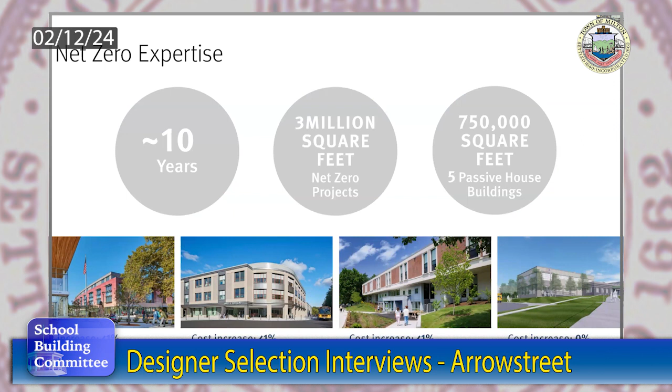So most of those projects have been done for little to no increased cost. There's no increased cost on the construction side, even in the past, but we saw a really great return on investment. We've been recognized internationally by Build Magazine for our work, not only in schools, but other net zero projects as well, as a leader in really trying to hone in on net zero as a way to get healthy, sustainable buildings at low cost with typical construction methods.

And that's really been sort of our sweet sauce of how we've been able to make this typical in all of our school projects. So in terms of the indoor environment, there's lots of aspects that are synergistic between a net zero energy building and a healthy indoor environment.

Things like bringing in natural light and daylight, views to the outside. That really helps students and teachers to be able to learn and to teach in that space. It also helps to save energy use, right? So there's these synergies between that.

Indoor air quality is one of the biggest benefits that you get, because you're getting all that great indoor air quality, which also comes with great acoustics and thermal comfort, and you're able to pair that with net zero energy to see all those cost savings on the operations side.

There are other components to the indoor environment that aren't explicitly regulated in net zero buildings, and one of those key areas is healthy materials. So we've been doing this again for 10 plus years, really focusing on classifications of toxic materials, making sure we're meeting those material selections that we use on all of our school projects.

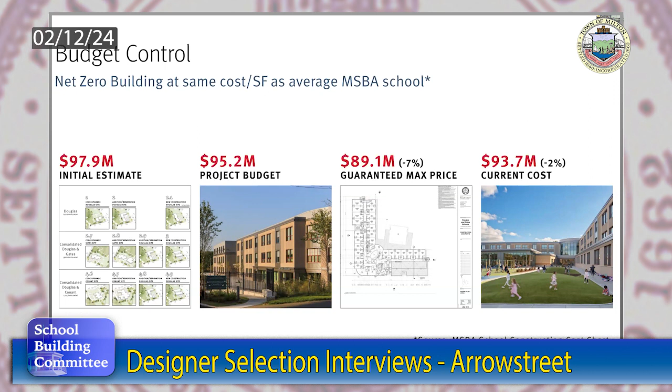And really, this is where it's all about, right? There's cost and construction and making sure we understand the cost of operating this building and sustainable forward to the people who are operating it. And through the construction and design process, we're really thinking about budget control. How can we make sure that all of the systems that we're doing are giving you that highest performing building, healthiest building, but making sure that you're staying on track.

As I mentioned earlier, in the past it was all about what was the return on investment. We knew a net zero building was going to save you lots of money in operations, but the construction costs might actually be higher. So it was like, is it a 5-year payback? What's that payback? The whole conversation has changed. There is no payback now. It's instant, because the construction costs of the net zero systems we're going to put into a building, the heat pump systems, are going to be less day one.

So you also asked about...

How we apply educational planning to really look into the whole grade reconfiguration and kind of reimagining middle school, which I particularly love that you asked about, because not only am I an educational planner, but the first career I had was a middle school teacher for 20 years. So this is really my sweet spot, and I'm excited to dig into this with you.

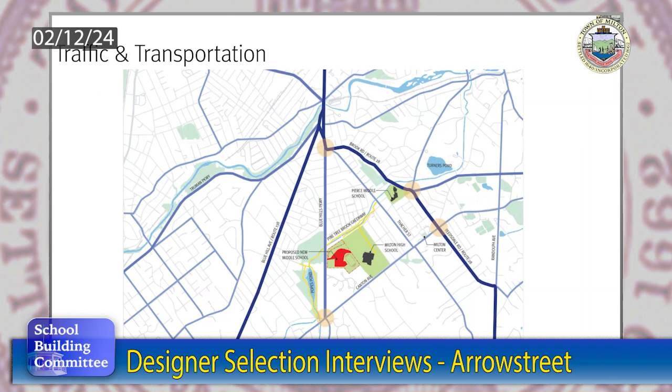So with that, I'll hand it to Jade. Thank you, Bob. Thank you.

So as we turn our sights to your site, let's take a moment and really appreciate what a treasure trove of natural resources you have. When we first came to this project, I thought I wish every child had access to this type of property. You have open space, woodlands, wetlands, rare habitat species, and a connection to a greenway.

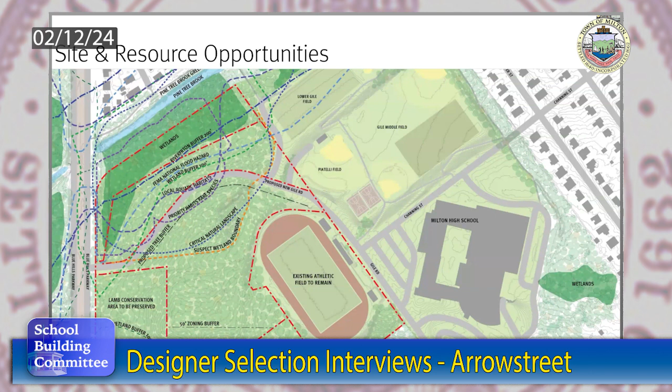As we were looking at these resources, we started to put together this early diagram, because you go out and think, look at the space, and then you start to look at the buffers, setbacks, and easements. So we started to put together an understanding of the build zones. And this diagram brought us back to a project we've worked on and discussed tonight, our project in Acton Boxborough, where we had 3 schools in 2 landscapes. Of course we got out there and thought, we have gobs of space to work with, we can't wait to build it up.

And then we did a similar build zone diagram, and suddenly it's like, oh, are we going to be able to fit a playground in here? But what ended up happening was that what could have initially appeared or been treated as a constraint, all these resources, they were nothing but an opportunity and completely informed the design. It really allowed us to have very creative and focused design thinking, which resulted in thoughtful outdoor classrooms, dining, gatherings, signage, these educational components all set within this rich, beautiful environment.

One last thing I'd say about landscape: I think everybody in this room understands our kids nowadays on average spend 90% of their time indoors, almost 50 hours a week in front of a screen. So our work is rooted in the latest research, because we cannot overlook the impact that exposure to outdoor play and nature has on our children.

Which is why I'm so happy to be working with this team, because at the end of the project in Acton, the town chose to refer to this campus as the Boardwalk campus. That says to me that we have proven that at the end of the day, we will deliver a project that integrates your program, your curriculum, your buildings, and your landscape, which we can't wait to see. So thank you, I'll hand it over to Dan.

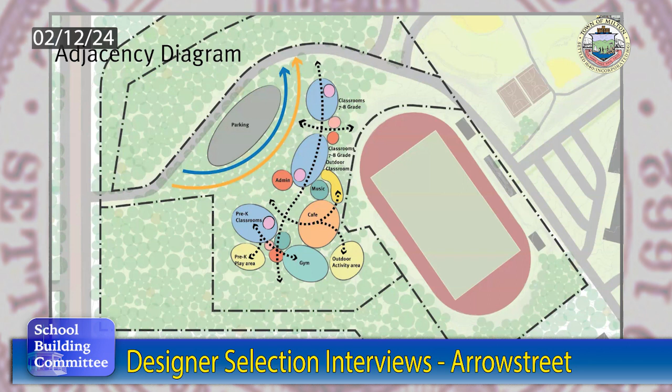That's how it could possibly organize itself, with a building that reacts to the existing site constraints in a way that is economical and efficient and minimizes disturbance to the site. What you see here is we have some possibility for classroom wings with nodes where the building changes direction with the contours, and those nodes could be learning nodes with breakout spaces or public learning spaces, similar to images from previous projects we've worked on that Tina showed you earlier. In this scenario, each one of these neighborhoods, including a gym and cafeteria, could be a destination.

So as Dan described the plan, we also started to try to create a strategy of the site in a massing form. And as you can see here, we've started to think about the approach to the building and what is the scale of the building on the site.

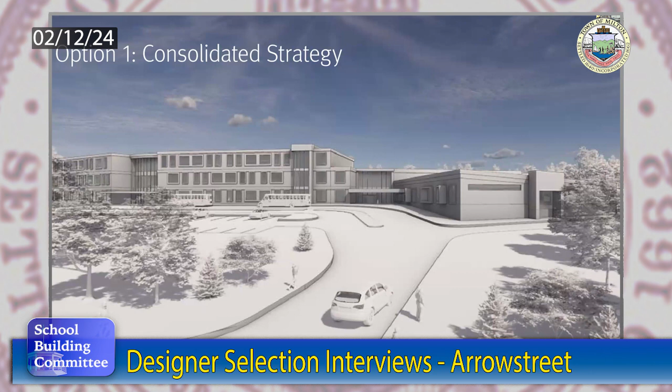To the left is what we're calling the middle school part of the classroom, with classrooms on the first level, mixed media and specialized learning spaces on the second floor, and then the top floor has traditional classrooms again, with students able to meet in the middle to connect them with these specialized learning spaces.

One thing I really wanted to touch on, as Dan was describing these learning areas, goes back to what Katie was saying with the Brook High School. The traditional learning classrooms can be typical rectangular buildings connected by specialized nodes, so you get the efficiency of construction with the traditional classroom sections, but then have these specialized areas that are really unique and represent the special qualities of Milton.

Can we just go back one, to the 1A. So right here, you can see the preschool flanking the drive as you come in. There's a separate entrance you can see on the right, so there are separated entrances for the middle school and the preschool.

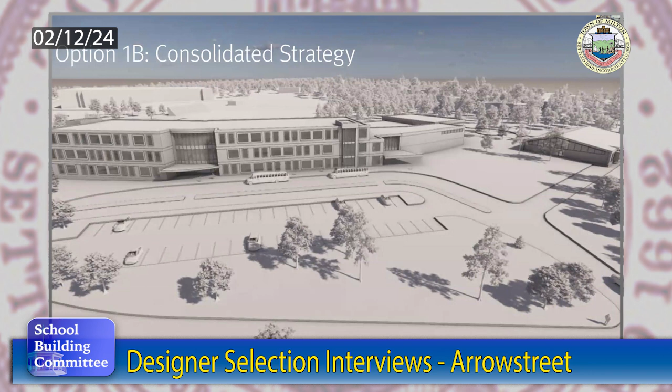As we studied that further, the additional scheme we put together shows this preschool building as completely separate, with separate pickup and drop-off locations, which really allows it to have a different feel, a different scale, and different appearance, which Sonali will touch on in a minute.

In this particular scheme, rather than having different wings with nodes, we kind of have one wing that has like a hub theme basically. You have your cafeteria and the gym sort of in the center, and one prominent hub in the center where everyone can come together and commingle.

In this particular scheme, we envision what the classroom areas could look like, with sort of miniature hubs that have sped and breakout spaces within them as well.

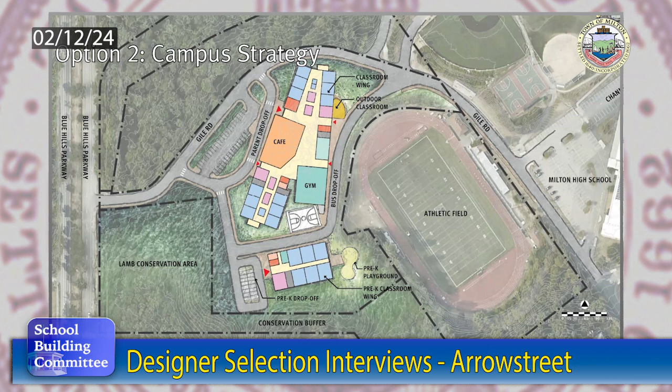So again, another strategy for the massing here, the approach really shows the difference between the middle school and the preschool. The preschool can have its own complete identity with its own separate parents drop off. And then the cafe and gym in the center are a slightly different scale than the 3-story learning wings, and that draws your eye in.

It brings you in. So then if those spaces are used for other public activities like voting or evening activities like a school building committee, everybody knows where to go. Their eyes are completely drawn to that center, and it helps mitigate the scale of the overall campus.

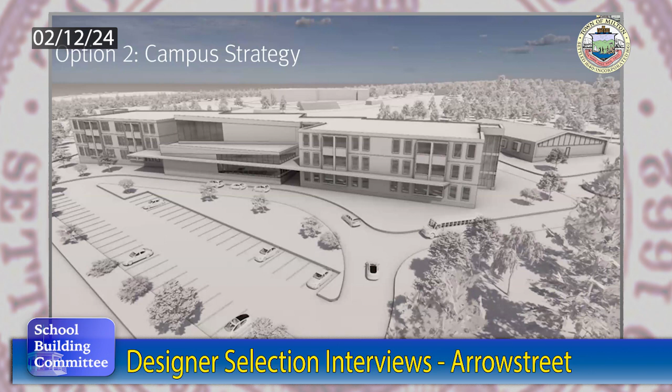And again, this is like a turned approach. One of the important things about this is it again reiterates that sort of traditional construction of the classroom wings, where you get that efficiency, and then note your special area.

So we wanted to wrap up talking about community engagement, because we understand it's going to be a real critical part of this project. We want to engage throughout the project so that we're getting opinions from the community from the very start and working with you, the building committee, to get those opinions through and really develop a common understanding to build community support.

So how do we do that? A couple of different thoughts.

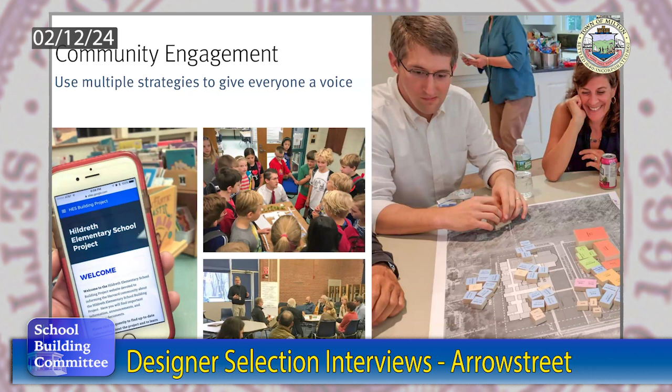Using different mechanisms to allow people to speak as they're comfortable, whether it's a traditional stand-up presentation in front of a large group, smaller workshops, bringing the kids in, allowing folks to work with pieces of the building, or using social media—all intended to get different voices and different ways that people want to communicate, and bring it back to develop the ideas further.

In addition, taking people out to the schools to look at it. In this case, the town of Harvard provided a bus and we were able to take the community out to look at different ways schools were being done, so people could understand it's not just the 1960s building anymore—the schools need to respond to that.

Really the goal is to get support at town meeting. We know that's critical to the project's success, and critical to giving the extra space to the district. What we want to do is a thoughtful and careful process that allows people to understand the project as it develops, and feel they can support it—whether in the sense of building on a new site, the cost of the building, or the reconfiguration. So all three things need to work together.

So with that, as we say, let's start a journey. We've finished our presentation and are happy to answer questions, give some comments, and start a dialogue.

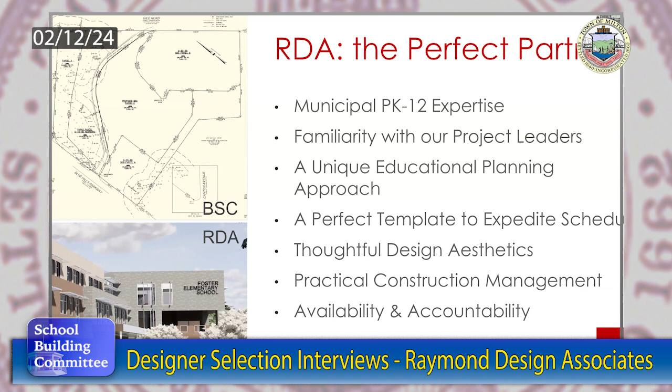unique approach to planning and programming the building, in that Mike Grillo, who's a former educator and education consultant, doesn't just come in and do visioning at the beginning and say here's what I think they want. He actually stays with our team, and we work with him all the way through design development, so he's translating between the educators and the architects as we go forward.

You probably saw our credentials. We've done a ton of secondary school work in the Commonwealth. We've also done a lot of early childhood work, so when I saw this configuration I was like, wow, this is really interesting. And we've done it everywhere - we've done a lot of pre-K centers, and our work in general is very practical.

We have a construction management side to us, but we do beautiful work and create lively spaces. We flood everything with natural light, which has a major impact on learning. We're always talking about how the buildings we build are all different - we don't do cookie cutters - how they can reflect the locale where they are. We're always trying to connect various levels of the building so that the school feels like a single community.

And then we of course create beautiful spaces that are used by the school but also by the community. We're always talking about connecting with nature - David will address that, bringing the outside in or the inside out. We do all sorts of inspiring learning spaces, from quiet libraries to active classrooms.

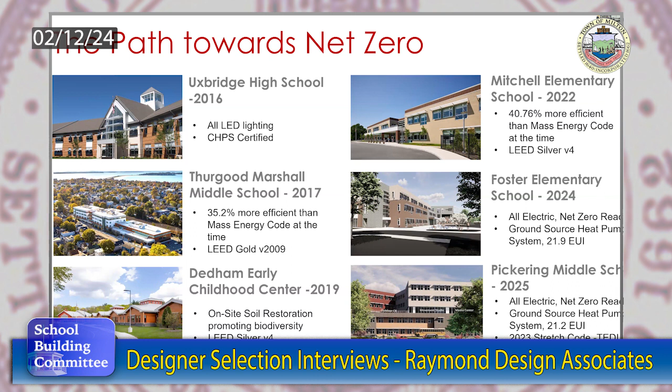So I'll start with our approach to managing a complicated project, and that's really any project for that matter, is to start with thinking about risk mitigation, being proactive with it. Avoiding risk starts and ends all throughout the project. It starts at the beginning, and it causes us to start thinking like a contractor. John Bartecki, who PMA is familiar with, is our in-house construction manager. That's unique to our business. And it gets us all thinking like a contractor, providing estimates early and continuously throughout the project, which helps us avoid risk.

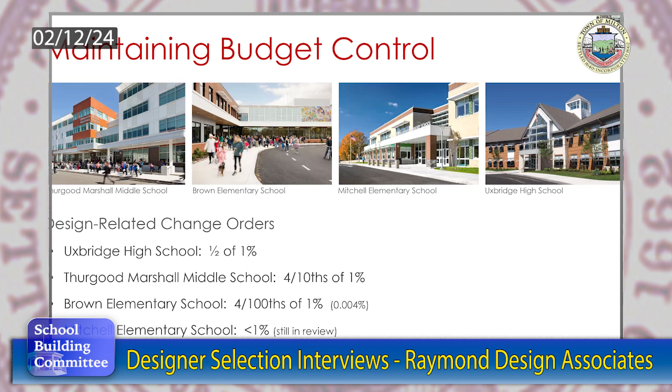So, we show you beautiful spaces. And once these projects go out to bid and the spaces are being created, I want to circle back to the end of the project. These are all brand new public schools, the most recent ones we've done. They're all extremely low on design-related change orders, all below 1%. The elementary school we just finished for the town of Marblehead is actually 0.04%. There were basically zero change orders on that project. So I think we not only do beautiful work, we also have this whole technical side of our brain. We're really mitigating risk and managing our clients' finances.

So how do you make it happen? We're here to make it happen, and I think this is a message we want to get across really strongly here, which is that we're very eager, but more importantly, we're available. We're ready to hit the ground running from day one, and that's from our senior staff at RDA and our consultants.

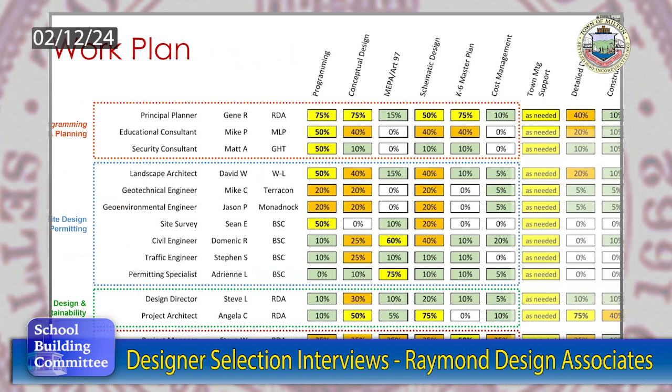Throughout programming and planning, there's sort of 4 tasks going on simultaneously, and we all have availability. We currently at RDA are only working on 2 school design projects. One of those is MSBA, the other one's a smaller add-reno. Neither of those are in the feasibility or schematic design phase, which is very intensive. We are fully available for this project. We think it through at the beginning, and this is our work plan, which we can come back to, but there's 4 simultaneous things going on at once between programming, site design, budget management, et cetera.

This project is more than just about the middle school. We understand this is about a district-wide K-8 solution. So as soon as you open your middle school, you'll immediately, on day one, be able to see a difference in all of your elementary schools, Pierce Middle School, even the high school. You know this, you've done really good work over the past several years. We're very aware of it. We think you're on the right path and would like to continue that process.

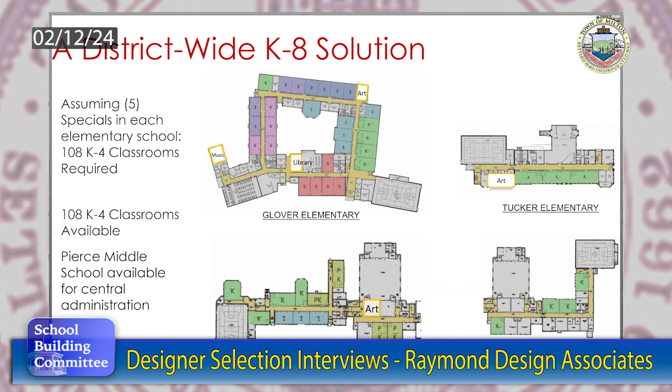These classrooms educationally make them more appropriate to the curriculum. And that means more than just pulling 5th grade and pre-K out of the schools. But how do you make these buildings, these environments, more appropriate to your district's curriculum?

So we want to support you during our study phase, so at town meeting, everyone understands that this is a district-wide solution. It is getting the consensus. And how do you get the consensus? You get people in the room, you over-communicate, you engage with the community, and that's how you get consensus. When you go to town meeting, you want to be able to say with confidence, this is the project and this is the time to do it.

I think along the way, the educational visioning, programming process, community forums and engagement tap into different stakeholders because every stakeholder comes with a unique perspective. Whether it's Milton's district leadership, tapping specifically into students, having integrated conversations with educators and content leaders about program-specific needs, and then cross-generational groups like you see in that bottom image. It's so powerful, literally when an elementary kid and mom and dad or whoever is with them are sharing their voices at the same time.

Talking about engagement, these are actually my former middle school students. I talk about engaging the middle school student because their voices are loud and clear and they really can speak to their needs. Middle school kids can be really academically focused. On the left-hand side, they're having a literature circle book club. And on the right-hand side, when we left the library and went back to the classroom, they're acting like little kids, touching their backsides, playing a brain break energizer game.

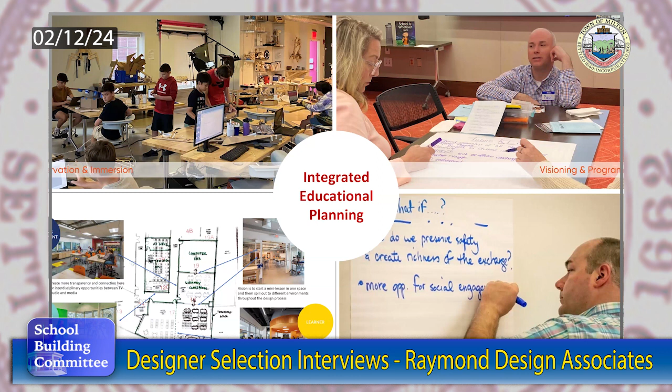And so supporting their needs is really important. Part of this integrated educational planning process really has 4 major components.

We start with observation and immersion to really support, elevate, and position stakeholders to even imagine what can be. Once they have the capacity to do that, we move on to the visioning and programming process, talking about child development and teaching and learning, and then the needs of the learning environment as well.

Educational planning also means rethinking existing programs and practices. I'm really interested to explore how we can take the high school child studies program and, given the proximity of the 7th, 8th grade building, bring that back and really support that.

Or implementing more SEL and academic supports. Now we're going to have a completely different grade configuration. 7th graders are now the youngest in the building, 8th grade remains the oldest, and 6th grade is the oldest in a different building. That completely changes the dynamic, and we'll study and explore that as well, looking at impacts of grade configuration.

So having deep conversations about what happens to the location of special education programs. I know the district is researching the current REACH program, the therapeutic program. What happens when we split the middle school population? Do we have 2 distinct programs in each school, or do we bring that population to one school to really support those needs and minimize transitions for some of the most needy students in the population?

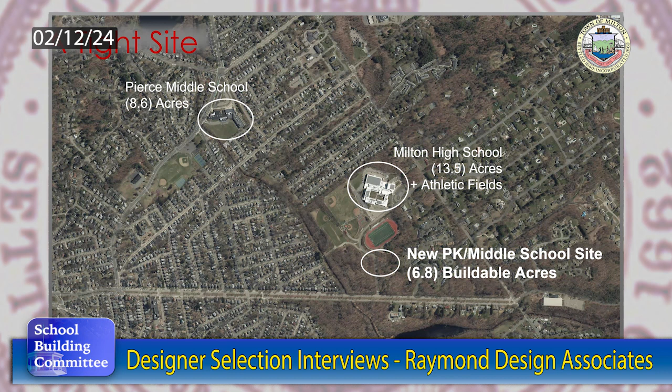So, site. I want to talk about site a little bit. What we noticed is this is really a fairly small site. We know it works and we're excited because we have a building and layout that works there, but you have to be very careful about what happens on this 6.8 acres. Just to put it in perspective, that's a couple of acres smaller than the Pierce.

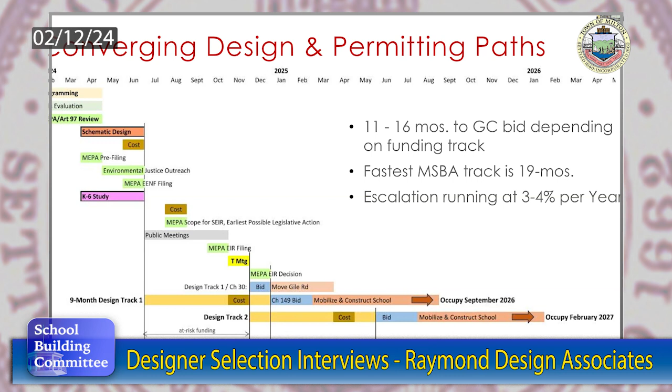One of your other questions was what's the difference between MSBA and not MSBA. MSBA, the fastest track you can do is about 19 months from the day you start until you're out to bid. This could be anywhere from 11 to 16 months, which translates into obvious cost savings.

But Adrian, we have a lot of permitting to do, right? Yes, absolutely, and thank you for that. We know already that the town of Milton is in the process of the Article 97 disposition and transfer, and we're looking forward to collaborating and supporting that work too. The site does have a couple of other environmental constraints to take into consideration.

On the plan, to the west is Pine Tree Brook, a resource area that travels through most of Milton, with a buffer zone associated with it. In addition, there's an overlay of Natural Heritage Endangered Species Priority Habitat. I was able to find out what that endangered species is — it's a wetland obligate species, a vascular plant. So we can do some additional surveying out there to find out exactly where that plant may be located, in case we need to cross into any natural heritage species area.

The final issue you have to navigate is the traffic matter. This is all in the context of the Massachusetts Environmental Policy Act, MEPA, a multi-agency permitting office of the Commonwealth. There are certain thresholds that, if you cross over in terms of impact, require the state and all agencies to review it at once. So the third matter is transportation.

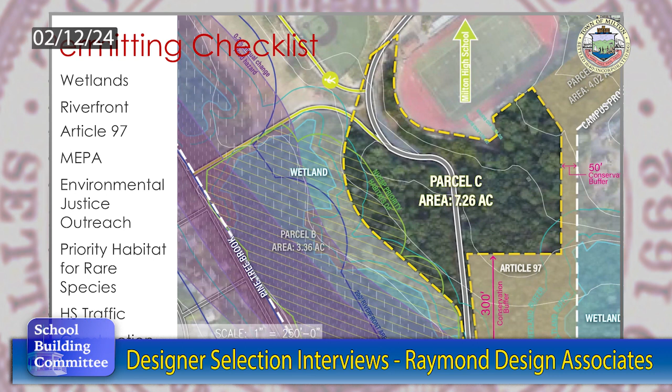Great, thank you. So, Don, now we're going to figure out how to build it.

Building on the great work that the committee's already done, that we at BSC had the privilege to be a part of, as Gene mentioned earlier, we envision this going out, and you may have seen it in the schedule, in sort of two construction packages. One would be an early site enabling package, under Chapter 30 for horizontal construction. If you're not familiar, I know a lot of you are, it's a simpler bidding process.

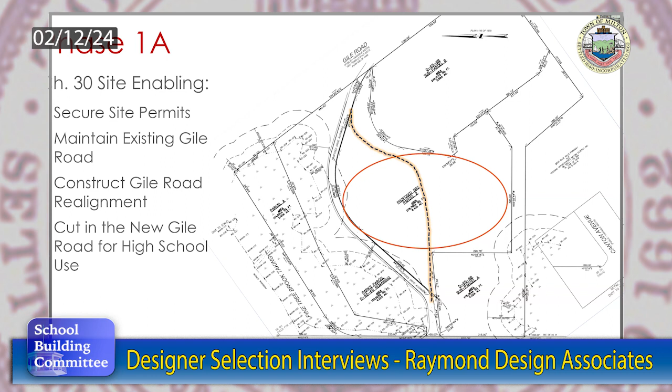The first part of that would be to relocate Gile Road. There was some debate on our end on that. To relocate Gile Road, we've done some concepts for you to shift that to the north in a way that you can very quickly get that construction done, keep the existing road open, transition over, say, a weekend, and immediately get that high school traffic and the future construction traffic onto the new road.

Which then opens up this space where we've already been looking at creating that pad for the new building. So what you have to do for grades, what you have to do with potentially some walls, utilities, et cetera, to really build that site up. And then you can transition into phase 2 of the actual building process.

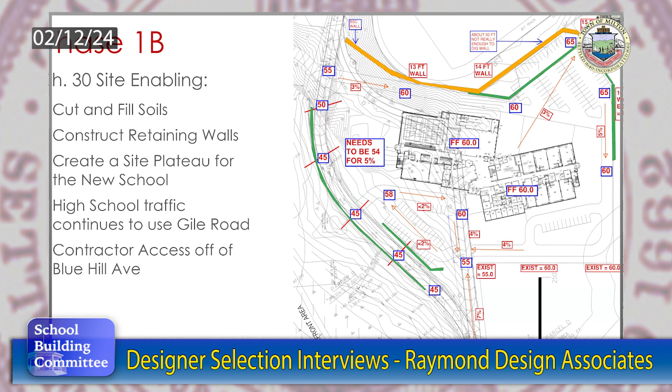Yeah, so we come to the site with a beautiful pad. We do some retaining walls, some cutting and filling that's happened. This package goes out early, and then we did the vertical work, which is the building.

So we've tested a template that we have and is working really well, which is a 3-story school footprint, long parent queuing, drop off for a pre-K center that will be here on the right side. But the queuing could also continue around the front to the front door, bus drop-offs, which are independent of the parent drop-off.

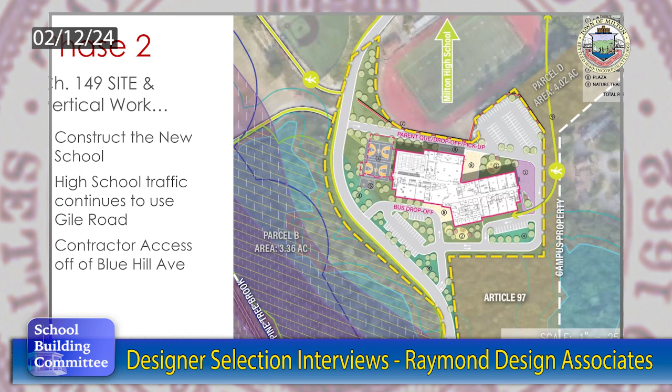And we know the site plan works really well, but David is going to go through the site planning. He's going to lead this effort. Thank you, Jane. So you've been hearing about constraints, right? I want to talk about some opportunities.

We're really inspired, even though this is spatially constrained, that there's real opportunities to create some unique outdoor learning spaces. One of the things we've learned from all of our experience working in public schools is that these outdoor learning spaces need to be close and really convenient to the indoor academic spaces so that they can be used spontaneously by the user and easily maintained by facilities.

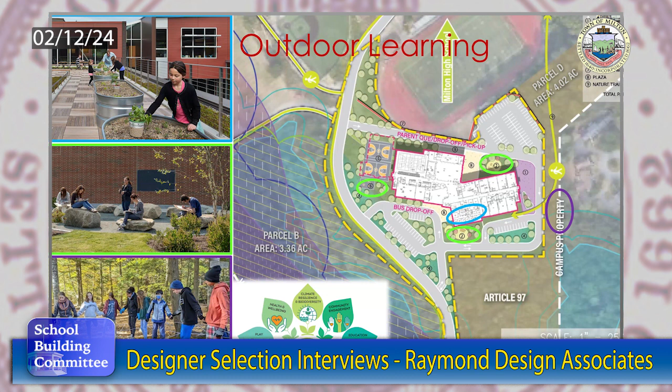We have in blue here an area that Jane will show later in the model that can be up on the roof. So the top left image, for instance, and the other images there are more at-grade outdoor learning spaces that are outside of the spaces directly adjacent to the building. And then lastly, out towards this natural area, Plan East, on the way to a pathway to the high school, you can also take advantage of those beautiful natural resources that are also being preserved as part of the Article 97 land. So looking at play spaces, middle school area, we're showing a multi-sport court off to the left end of the building there.

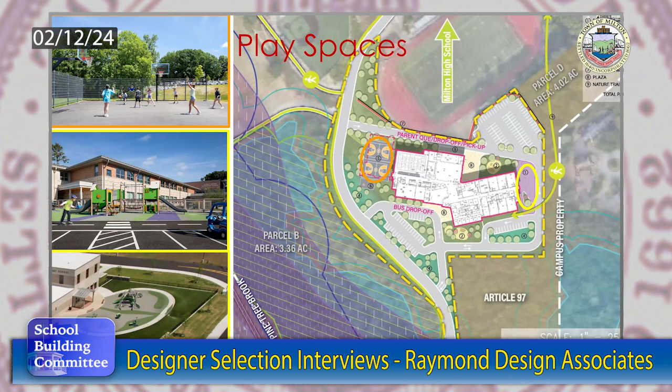Next slide. And then the last thing I want to talk about are the campus connections, which is one of the really smart things to think about doing the middle school at this campus.

We know there's an obvious connection between the early childhood program at the high school and a potential pre-K wing on this end of the building. There's obviously potential for athletic connections as well, and other community trails, sidewalks down to Blue Hill Ave, et cetera.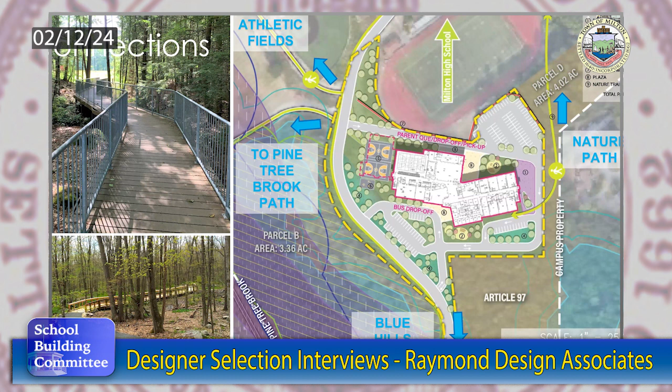We're excited that we have Mike on our team. We're excited we have David on our team because these people really bring a lot to it.

We want to run you through our thoughts. Again, we are just constructing a building that has a pre-K wing, and we said, this would be perfect—happens to be an elementary school. We're doing it with PMA, but working with Mike and Steve and others in our firm, we thought, how do we turn this into a middle school? Because it already has a great pre-K wing, it fits on the site, and circulation works.

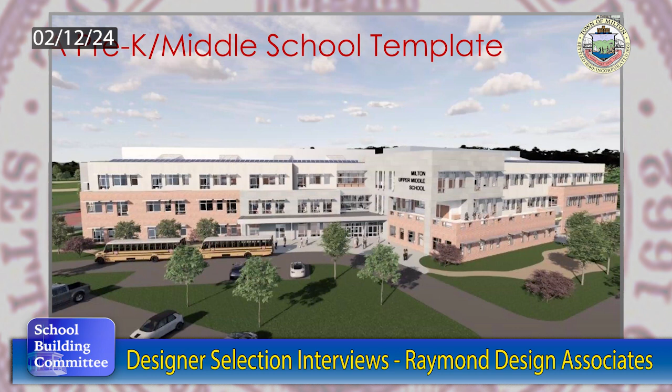What you're seeing is kind of reminiscent of what we're doing in Hingham, but it doesn't have to be that way. This same organization works well, but we're not going to come and say this is what it has to look like. You guys have a rich history, beautiful buildings—your fire station back there is unbelievable. But your school system has kind of a language, so we will be exploring things and taking feedback from you and the community as to what form this template might take.

Let me explain a little about it. On the first floor, to the left side, is a community wing—cafetorium, platform, gymnasium, a multi-purpose room, which in this case we feel could support the pre-K program. It could be an adaptive pre-K space, but could be used for many things, like a yoga studio, or adaptive PE or play for the kids.

We have an administrative wing that covers the main entrance, a 2-story learning commons, and the pre-K, as I mentioned, has its own entrance. So really this pre-K wing is pretty much what we're doing in Hingham and ready to go.

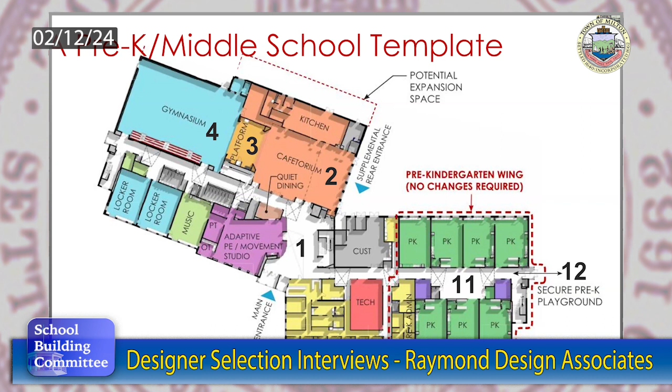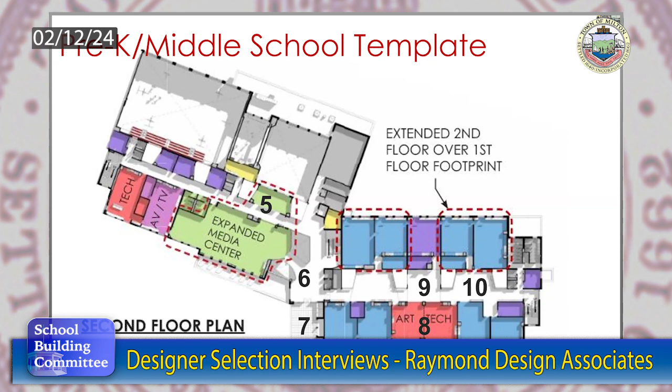One reason there might be value in working with this is connected to that outdoor play area that David mentioned. On the upper two levels—the second floor—this building is already set up for team teaching, with all grade levels sharing a commons, and in between there are opportunities for special ed, language support, maybe a STEAM hub. We also have a large media center meeting MSBA square footage needs, which spills out onto the upper level of the 2-story lobby.

So if you'll let us try—Mike, I don't know if you want to come over or stay where you are—we thought we'd fly you through this thing a little bit. Can you see the model? No, we're seeing whatever's on the screen.

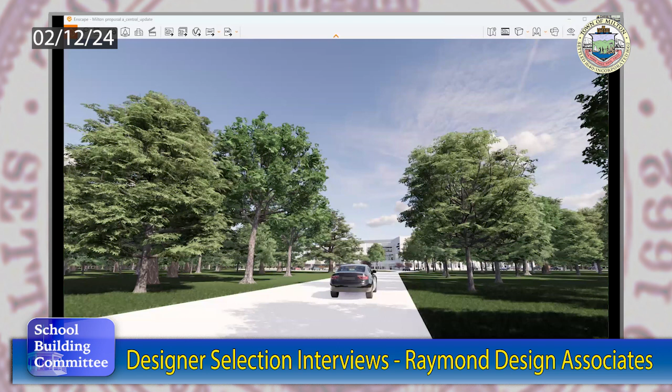So there we go, the screen is the hard one. You should have the model on the left and photos on the right, so you see both. The people on Zoom see it, but we're only seeing that. I can share my screen with everybody, but is there a way to get it on both? You just duplicate your display rather than extend. Is it actual animation or slides? It's animation. So you can discontinue the PowerPoint—just stop it and close it out next. Sorry, no rush, man. There you go, there you go. Share the screen rather than the application. Thank you, David.

There we go. All right. Awesome. Yes, sir. Excellent. Okay.

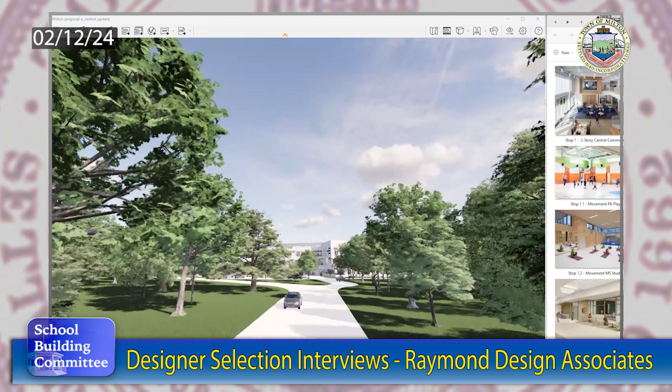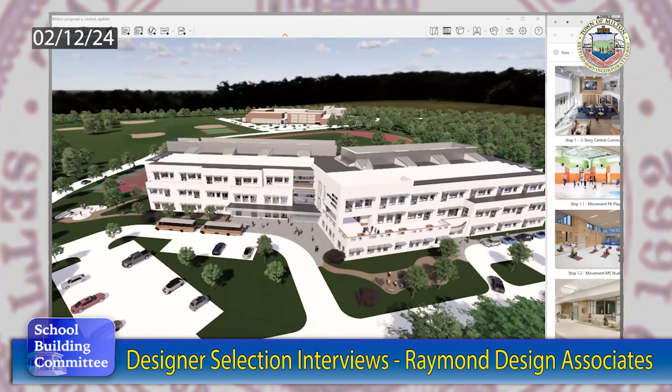So I guess what I want to say is this is a template - it is not your middle school, because we haven't even started talking to you about your school, but we know it works. This is one of the tools we can use when we're out communicating to the community and taking feedback. What you're seeing is a black and white model, but it's to scale. There are outdoor learning areas, and what I thought I'd do is bring you into the main entrance, then we can stop on the first floor of the lobby.

Nick's a heck of a driver.

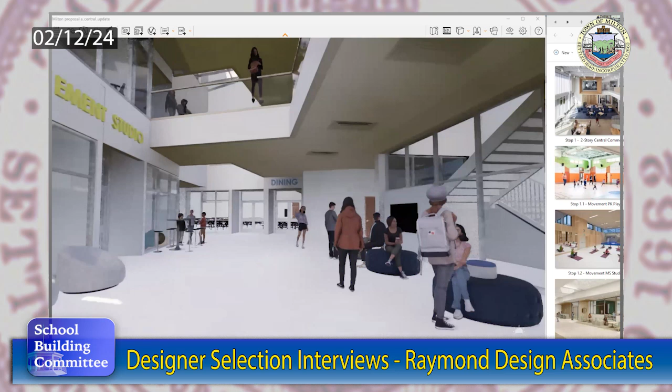So what we want to do is, when we enter in, we want to see activity. We want to be kind of in the heart of the school. And if you remember from the plan, we have a multi-purpose room, which could be a movement studio or a pre-K zone. And then there are floor openings.

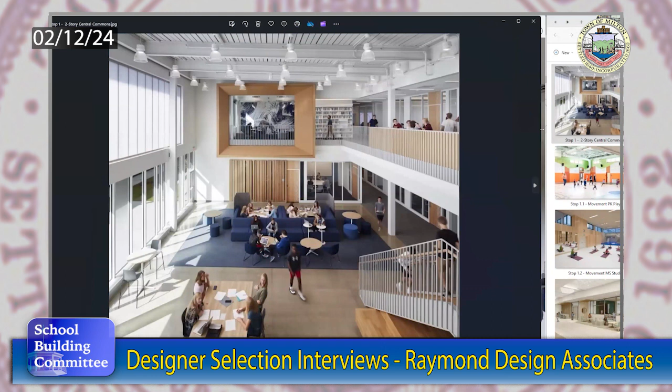Nick, if you pull up that picture, we're going to go through a combination of the model and some examples. One of the things Artie and I did in this process was our own mini visioning and programming based on everything I could find out about the district, to understand the district's needs, and also best practices in middle school design and education.

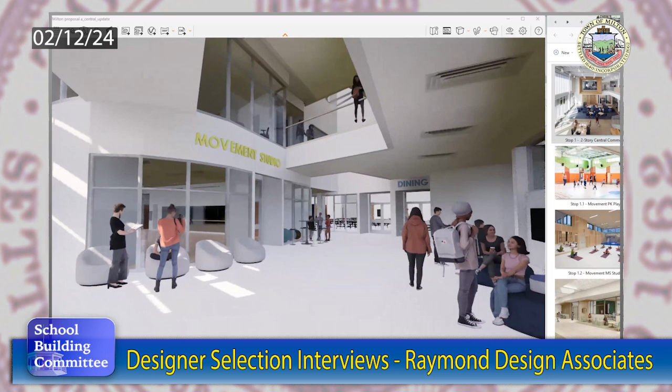I think what this is showing is creating opportunities where kids can take a moment and take a breath throughout the day, and also exploring the idea of whether every child needs to eat directly in the cafeteria, or if the cafeteria is right there, is there an opportunity for a quieter sensory experience just outside? What if there are books out there, and a kid wants to read instead of eating in the loud cafeteria? That lobby can also be used for cafe nights and things like that.

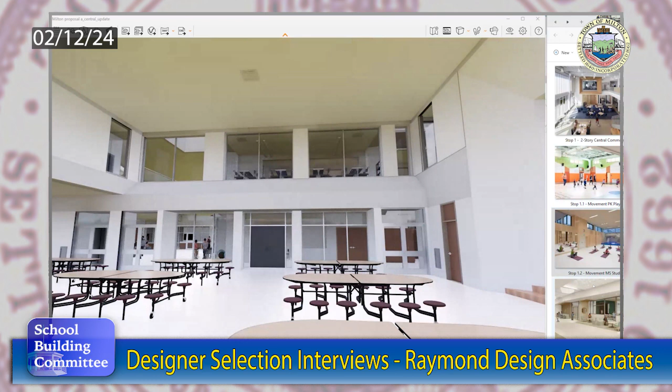Nick, go a little further down and look this way. Some kids may not want to go into the hubbub of the cafeteria on certain days, so they could go across the hallway where there's a quiet dining area for them. There's also another area up on the second floor connected to the media center, but still visually connected to the cafeteria.

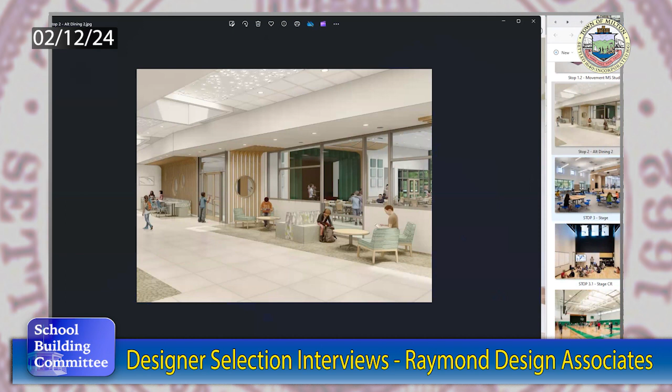This is an example from Westwood, the Hanlon Elementary School, where the vision was kids having the opportunity to dip their toe into the cafeteria. You can see how it's visually connected for supervision but acoustically separate, giving kids that opportunity. Lunch bunch groups and student council meetings happen out there, and it creates so many different layers to really meet kids where they are.

Now if we have a two-sided stage, it opens up onto the cafetorium or the gymnasium. If we stop here, there's natural light in this stage.

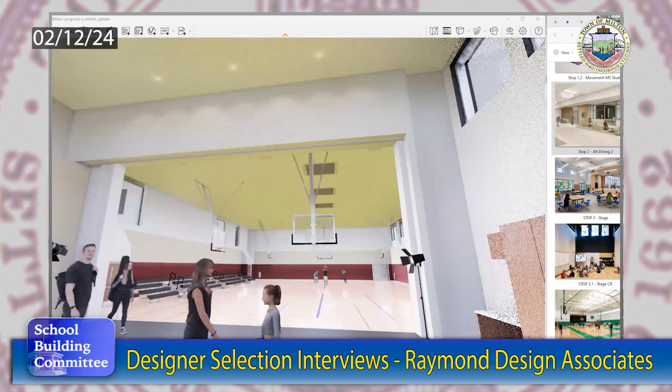If Nick pulls up this photo, this is something we did in the town of Marblehead, where we had it open to the gym and open to the cafeteria, but set it up so it could also be used as a spare music room, so it's not just a space that gets used 2% of the time during the day.

Then into the gymnasium, if you have larger gatherings, it's a bigger space, you have bleachers, and you can add more seats. This is an example of a stage in a gymnasium we did at one of our middle schools up in the North Shore - they have capacity for almost 1,200 kids. It's a large gym, but you can see the stage opens up this way as well.

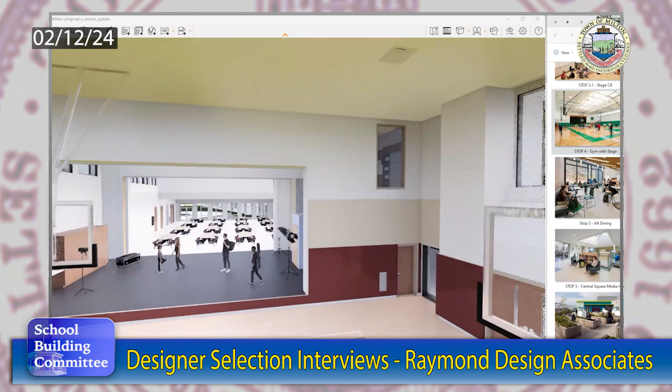One of the powerful things about having a double-sided stage is, especially in middle school - I was the theater guy - you can have various types of performances, some more intimate than others, and literally have two completely separate things going on at the same time.

Where's the accessibility for that stage? I'm just curious. There are ramps - they're beyond, okay. But we were thinking about how stages don't get used that often, so we definitely made a point of getting light in there and making sure it could be a multi-purpose space.

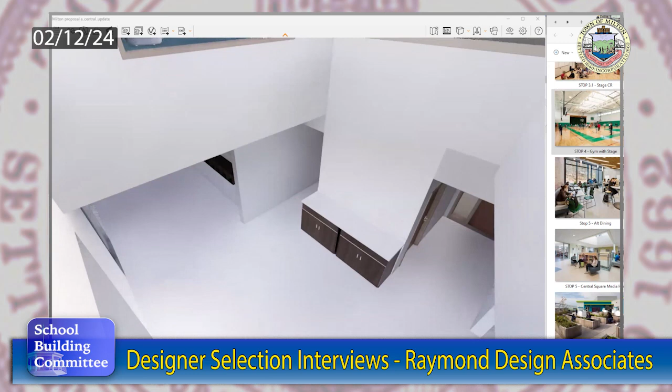Nick, if you went up to the second floor - we have a series of light wells that come down through this building, because we want to use every single square foot of space you're constructing for learning, and a lot of times that's going to include corridors. The corridors are in the middle of the building, and we want to make sure we can get natural light down into those areas.

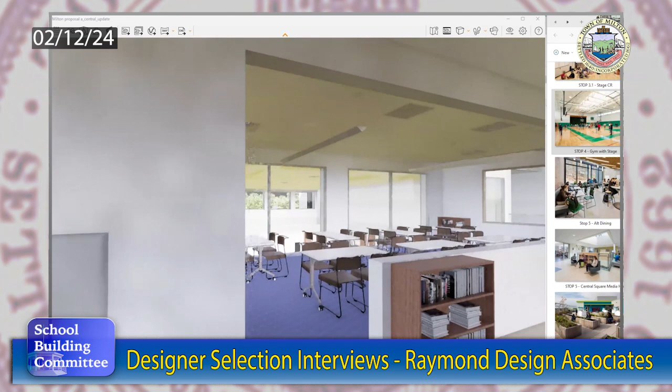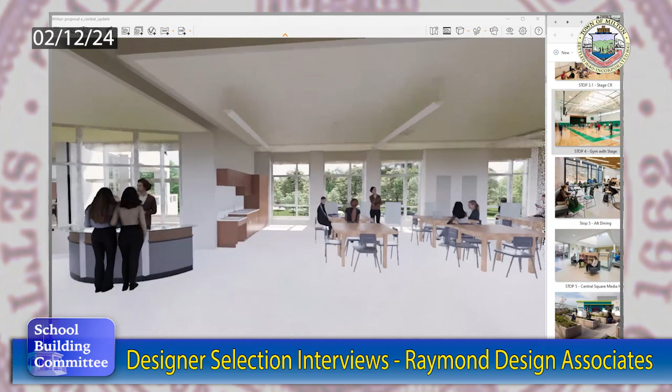So Nick just showed you one of the light wells. If we come down toward the learning commons, you're passing the media center. Nick, maybe you could take us to that second alternative dining or project area. So this is the one I showed you that you could see from the cafeteria, and again this could be another place for someone to have lunch, or do projects. If you go through the media center, you can spin around, but we can exit back into our commons. This is the upper level of the two-story lobby space.

One of the things we studied in a lot of the research I do, because I was the English guy, so I'm all about books and literacy, is how do you increase a kid's reading life, especially at the middle level? Because that's always the breaking point of whether they're going to be a lifelong reader or not. So that image is from the Gates Middle School in Scituate.

And studies have shown that the more you get books in kids' hands, it increases their capacity and interest in reading. You can see we're studying, is that something we could do? Bringing book stacks. Yes, there might still be a library as a destination, but what if books are closer to kids? So their day-to-day experience of going in and out of their academic neighborhoods, there's books at hand's reach. In that school, circulation increased 200%, which is amazing. This is a space you'd see right when you came in the lobby. You see it up there.

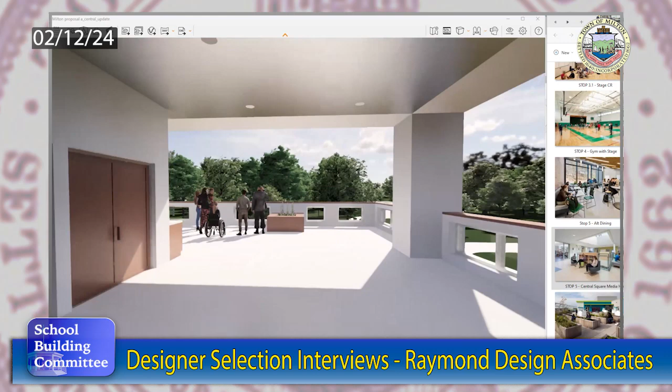So that media center, kind of learning commons, is connected directly to one of the outdoor learning spaces. In this case it's a terrace, so it would be overlooking the woods between your school and Blue Hill Ave. Part of it's in shade, part of it's got a beautiful southern exposure. There's all sorts of learning opportunities I'm sure the school will come up with, but we have some examples.

This is a learning deck in the city of New Bedford, but they have weather stations, they have kind of an outdoor classroom, they have planting beds. I know Mike's been involved with some where some of the planting beds are on wheels, and they can actually bring plants into the building during the cold months.

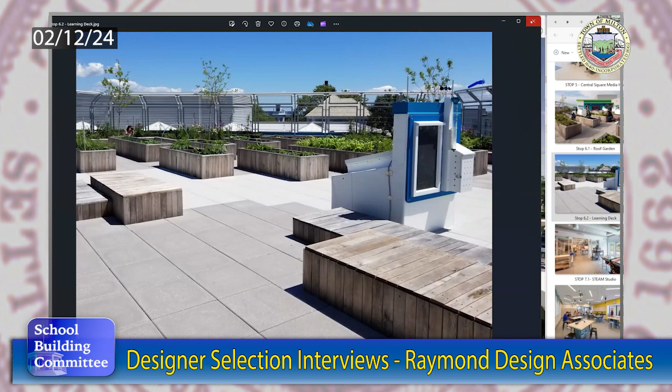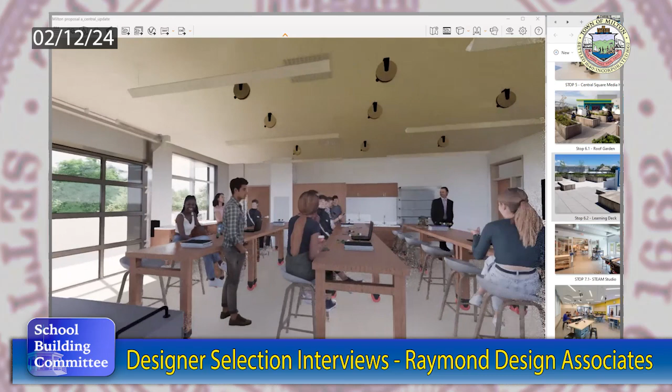So if we go down this way, this outdoor learning space, which has some STEAM attributes, could be connected to an art, technology, STEAM hub that's between two of those clusters of classrooms. One of the things we'll study in visioning and programming is people use the buzzword STEAM, but people always forget the A in STEAM, which is art and arts.

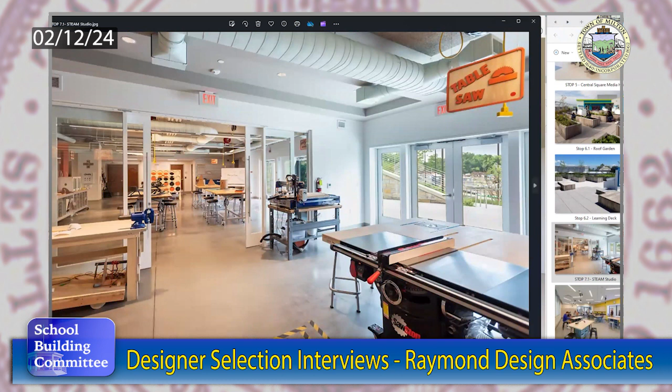So what if art and technology and literacy really all became one thing? What if you could take an art room and a tech room and they could be outfitted almost the same way, so that over the building's lifetime, as your enrollment continues to change, as your programs continue to change, you could have two techs going on at the same time. You could have art and STEAM going on, or you could open up the wall between the two and literally create this really dynamic opportunity.

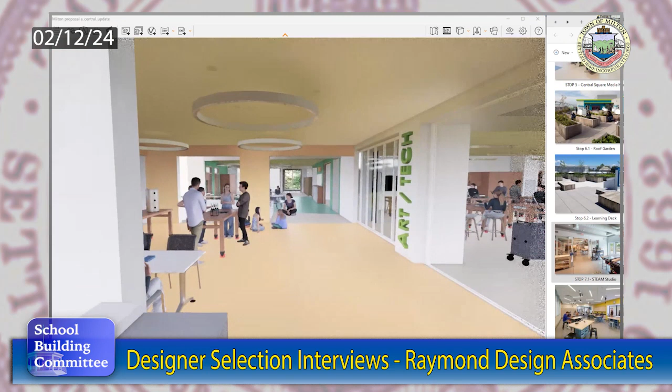Like the Fuse curriculum you're currently using for STEAM, I'm familiar with it, and one of the projects is kids have to literally create the fastest roller coaster they can. You need space for that. So imagine spilling into each classroom, but then also spilling out academically into this kind of shared commons, so kids are working on the floor, or everybody's gathering to do the mini lesson, and then they sprinkle into the different room they need based on the materials they're using or where they're at in the design process. It literally creates that personalized learning and that in-the-moment learning that kids excel at.

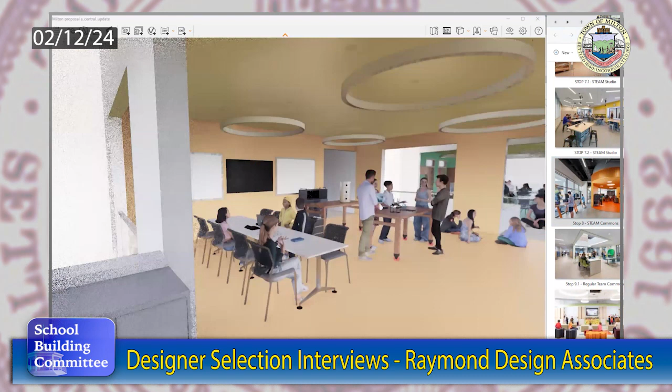So spilling out into the hallway, right? That's why I was talking about bringing natural light.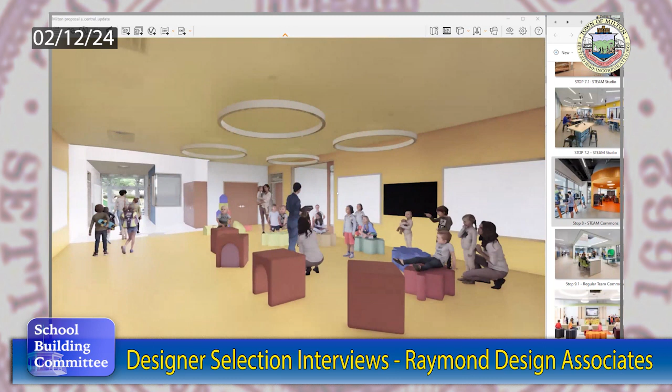If we go down to the pre-K level, there's actually an opportunity. Again, we had 7 classrooms. Maybe it's enough, maybe it needs to be more. We've done pre-K centers all over the place, but we could also have that common space outside the classrooms. This happens to be the main lobby and welcoming center at the Dedham Early Childhood Center, which we opened a couple of years ago. So it's not just keeping the students in the classrooms, it's kind of helping them all gather, and it's actually flipping it.

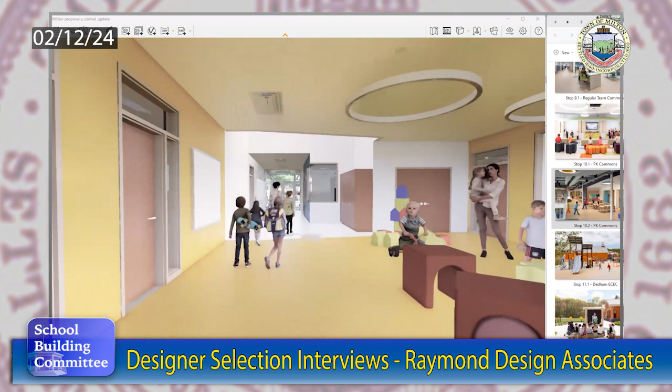It's saying the shared common space where we're all together, especially in pre-K. Early childhood has so many things—blocks, dramatic play areas, sand, water tables—that take up so much classroom space. If you bring those out into a central community location, you create an amazing sense of belonging, and the classrooms are freed up to do different things teachers don't often get to do.

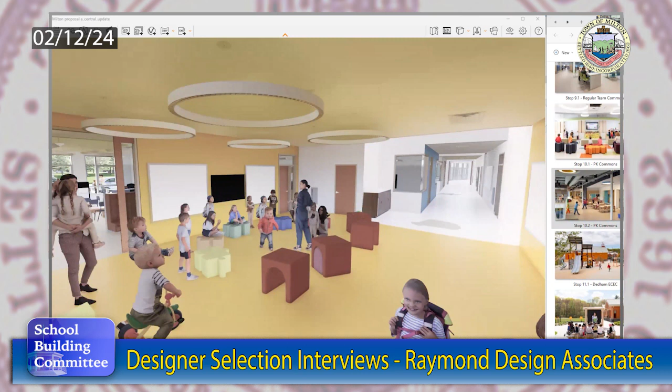And when it's raining and snowing, like tomorrow, and you have indoor recess for an entire week or winter, these spaces can become indoor recess times as well, or they could go to that multi-purpose room off the library. Connected at the end of this wing is the pre-K playground that David had talked about—a safe, segregated, age-appropriate playground for the pre-K students.

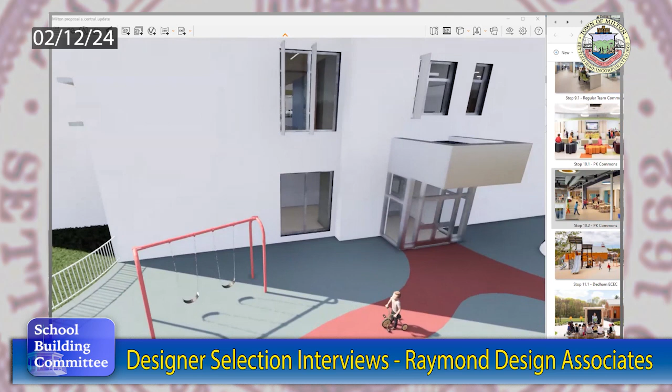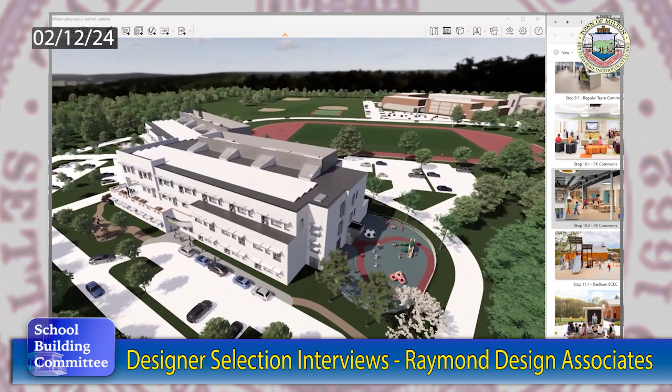All right, well anyway, in questions we can come back to pictures of examples, but Nick, maybe just spin it around and show how the campus works. So if you head toward the main entrance, we have the pre-K playground with the path to the high school. We put the majority of the parking behind the building so that you can celebrate more of the open space in front. It's hard to do on a tight site.

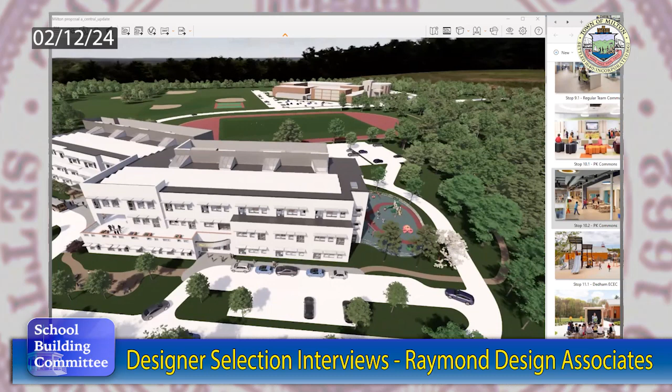This was all imported from the Revit model. Yes, so we do have the advantage, right? Honestly, this template seems to work really well, and it's based on the school that we're working with right now.

The spaces you've seen and the arrangements are actually very close to what we're doing in Binghamton, to this elementary school. So you can just see the whole thing—there's outdoor learning opportunities all over the place, and obviously the connection to the high school campus.

So I think with that, we should probably—I do want to say one thing. I want to say this is a skeleton that we can work with, and we can be efficient with it. I think we really enjoy working with David and Mike, and they're not here just for the interview, and not just for schematics—they'll be through the whole project. So I think there's a lot of value to that.

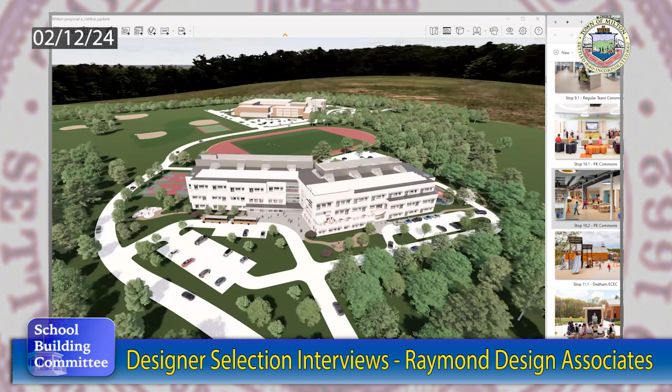I like to ask this question: is your construction administration person going to be part of the design team? Yes, he's actually out in the hallway—we couldn't fit him in. There he is, he was on one of the slides. I'm with them the entire time; I spend time in the office with them, overseeing what's going on.

I asked that question because I know, as an architect, some architectural firms have a CA department—that's all they do. We have a... some firms collaborate, and I like the collaborative approach.

Yeah, I like to hear that. John actually goes to every single design meeting, every meeting there's a project, and I think our clients are like, who's this guy? Why is he sitting here? And every once in a while he'll throw in something, but he's an amazing asset because it really frees up the team to do the design work. When we're doing slabs and slab edges and putting steel up, everything goes quickly because everything's already dimensioned, all the ducts are figured out, all the coordination is done. So if you're an architect, I'm speaking to you, but it really does go smooth.

How much design time and construction time do you think? Well, construction time maybe not, but how much time do you think we can save with this model school approach? I know it's not technically a model school, but it's a model school approach.

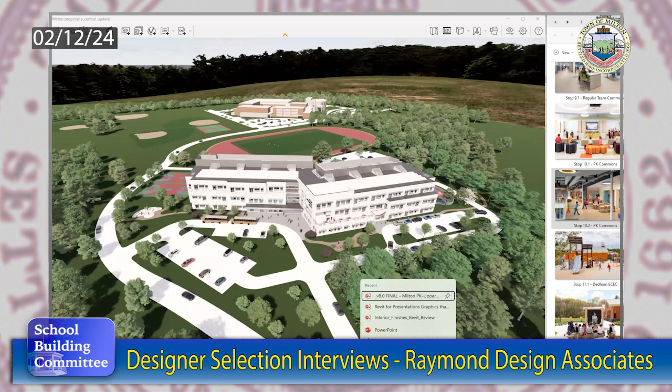After a certain threshold, there are a couple of different combinations. There's one that's 2,000 average daily trips, and another at 3,000 average daily trips, in the eyes of the MEPA office, that require mitigation. That mitigation is often offsetting the carbon impact of gas vehicles coming to the site, a lot of which is done through the greenhouse gas analysis associated with the school building itself. This is really common in redevelopment projects now.

It's not just a municipal issue, it's a commercial issue too. Most hotels and retail commercial centers are now being forced to move to an all-electric facility because of so many new vehicles coming onto their parking lots every day. So one thing we'll be focusing on is how many parking spots we're putting on site, how many vehicles we anticipate, what type of vehicle it is, and organizing the site constraints around that. We also understand most students who take the bus to high school and middle school travel on the same bus together.

Yeah, superintendent, so the buses are already going to the site for high school because it's a campus setting, so we could understand actually how many parents are dropping off and picking up.

When you started answering the question, you said you have to — who's going to do the site, your team? We will do that for you. Yeah, we will.

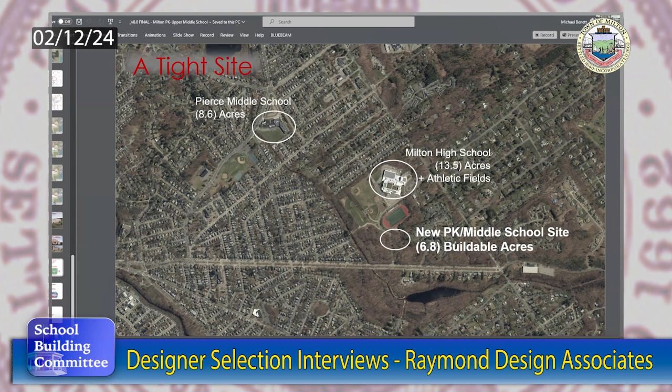So if you can do it 6 months quicker because you're not going through all the design reviews that the MSBA requires, that translates into real dollars in terms of when you bid.

So there's a couple things on MSBA. One, when you're doing their process, the fastest you can possibly get through, in our opinion, is about 19 months from the day you start to the day you're starting to go vertical. We try to cut the construction by doing early site packages. Depending on whether you do interim funding and bid a little earlier, or wait till town meeting and bid later, we think it's 11 to 16 months. So 11 is an 8-month saving over MSBA. But how you want to handle the funding of design is obviously a discussion.

I also want to say, with MSBA, they're prescribing the size of all your spaces. You may not need spaces that are 850 square feet, or 2,000, or 1,400 for a science lab. Your program may have smaller class sizes, and your program doesn't require that square footage. So sometimes they're following their template, and it's a great agency, they did a great job. But sometimes you're building more than you might need, which also translates.

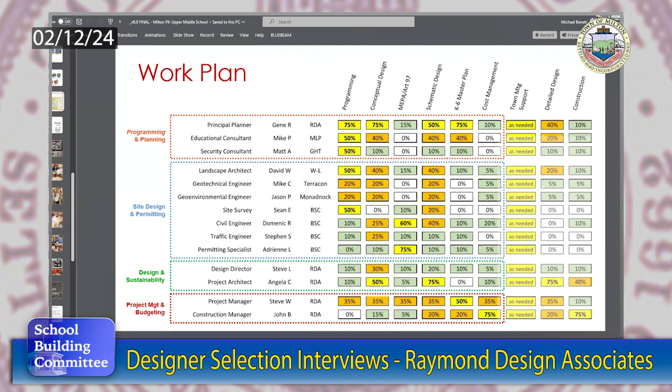I do want to say, Steve had that other slide where there's really 4 things happening at once. Mike and I are doing the programming, these guys are doing land development, Angela and Steve are working on design stuff, but Steve Watchorn, besides managing the project, we want him involved. We want to do your elementary school work at the same time, and I know you said that would be reimbursable or whatever, we're fine. It looks like you guys have solved it, and we just need to validate it and get it into a presentable form.

Okay, so the cost you're showing up there basically comes in June or July, but in your proposal you indicated it could possibly be end of April. For cost? Oh, April 2024. I'm really sorry, I don't- Yeah, it's on page 5 of your proposal. You guys indicated that you could have costs essentially by the end of April. I think that's extremely aggressive because there's a lot of stuff that has to get worked out. So I'm trying to figure out, are we talking June, July for costing, or are we talking April? I don't know if it's April or May or June, but somewhere between April and June.

The thing about working with this is we know the costs because we're building it right now. With John on our team, we have professional cost estimators as well, but when we're looking at things, we're constantly asking, what's this going to do to the budget? And he's constantly telling us, you can do it, you can't do it.

The spirit of what we were saying in the proposal was we want to get you information as fast as you can so you guys can socialize it up until whenever you're going to ask for funding. Yep, appreciate that. I feel like I'm talking really fast.

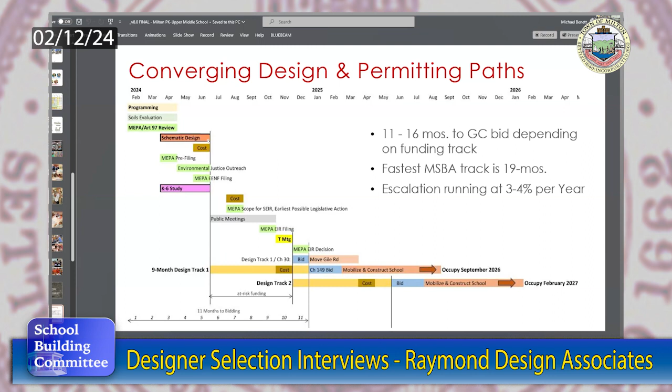Can we go to the site plan one more time, the one with the building on it? So thinking of the building just as a block, it's maneuverable around the site. On the right side of the page, on the campus property line, to the right of that is an elderly development, Home Inc. So we want to be cognizant of them, of where the school's located and where the parking's located. We've had discussions with them leading up to this. I'm just saying this for the public's consumption: there's parking, there's playgrounds, and there's a building, so one of those three are going to end up in that area near their proximity. Part of what we want to do too is work with them after this, once we make a selection, to figure out what parts and pieces end up over there.

Yep, that's not a problem, it's kind of David's specialty. Yeah, that lot right there that we're showing is really embedded into the hill with the big retaining wall supporting the track. All the way back around to the east side too, and then you've got the big woodland. So really the housing is more along just the driveway portion of that, not so much the parking.

And of course the lighting would all be full cut-off, low fixtures, dimmable with controls that allow you to turn it off entirely if that's appropriate from a safety standpoint. We call it test fit, we know it works, yeah we tested it. But during the process, if you guys say it's really important to pick up another 25 feet or whatever, and things have to shift, that's part of the process. And we're very cognizant of the issues here, and other issues around the site.

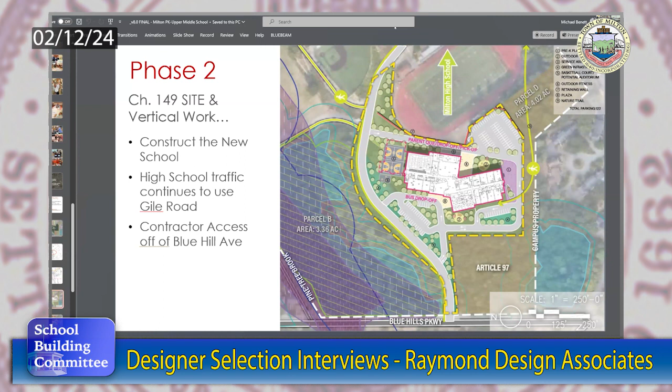Any other questions? Great, thank you. Thank you. Yeah, thank you, I hope it all works out, because we are looking for something to do. I would love to, I would like to work on something, I really would like to work on close to home. It really means a lot to us. Gotcha. Thank you, excellent, thank you very much.